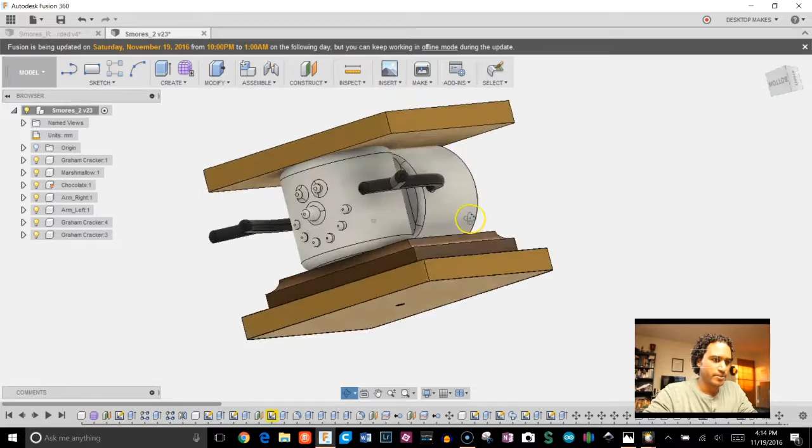Okay, let's go ahead and jump into Fusion. Here's our finished model, so this is what we're going to have when we're all set. Let's go ahead and open up our previous model. So this is what we have so far.

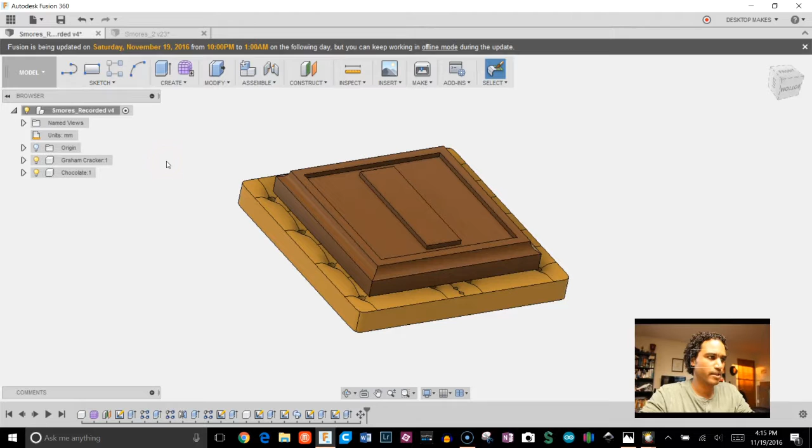Okay, let's begin this one. First thing we're going to do is start with a component. I'm going to right click, choose new component, and we're going to name this marshmallow. We see that our component is activated, so we can now go ahead and start sketching.

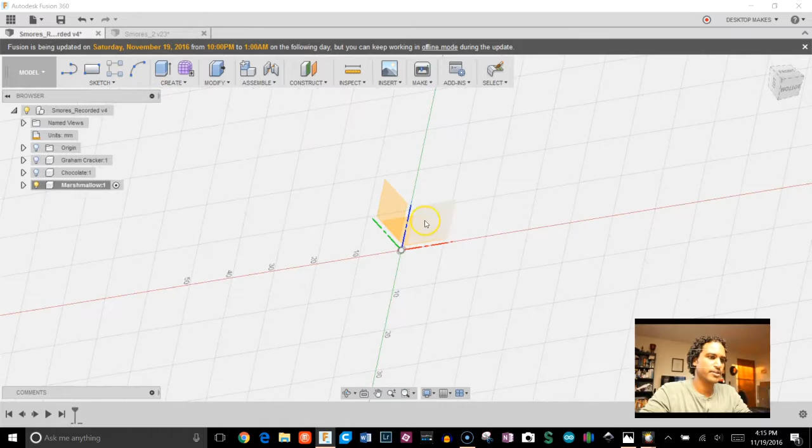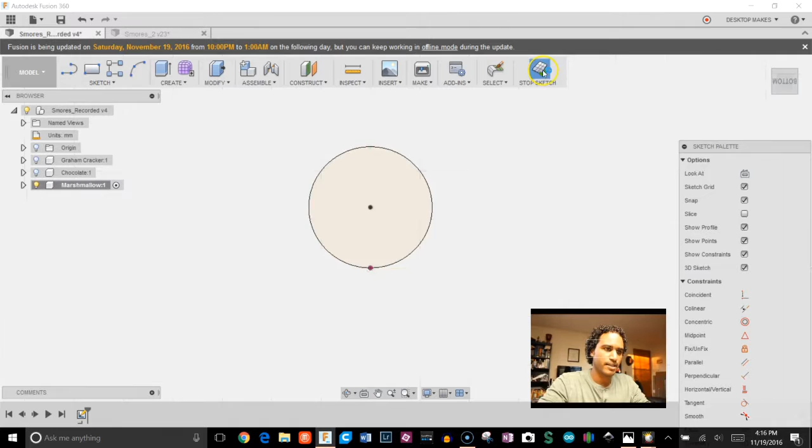I don't need to see this here, so I'm going to uncheck these light bulbs. We'll start with a sketch on our ZX plane. I'm going to create a circle somewhere up here, give it a diameter of 25 millimeters, and set a horizontal/vertical constraint right to that origin. Next, I'm going to enter a dimension of 12.5 millimeters and click Stop Sketch. We're going to extrude this out to 23 millimeters.

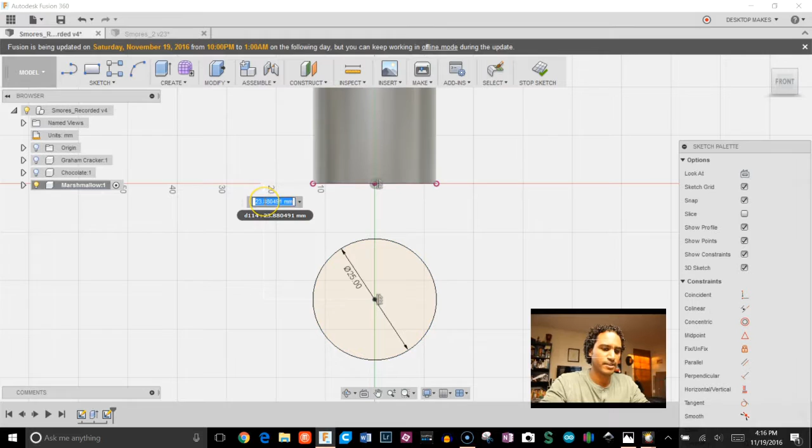Alright, create another sketch, this time on our XY plane. Same approach - I'm just going to draw a circle here, constrain it to that origin, and set a dimension of 11 millimeters because I want to get that little overlap in there. Okay, stop sketch, and I'm going to extrude this up 25 millimeters, click OK. Alright, next I need this bottom and top to be completely flat because it's going to sit on the chocolate.

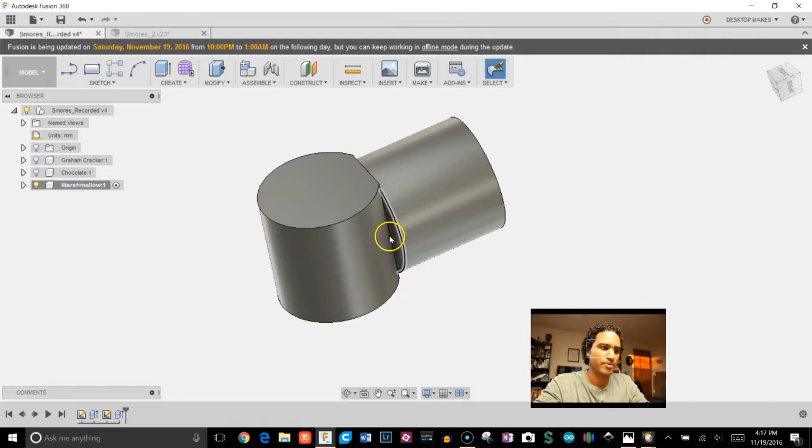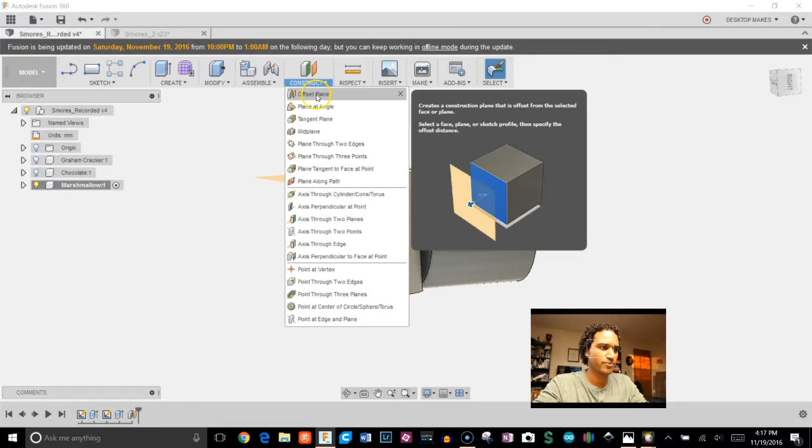And also I'm going to have the s'mores on top of it, and I need a way to be able to glue that in and have it have a good surface to glue to. So we're going to go ahead and create an offset plane, construct offset plane and choose this top plane here to base it off. I'm going to enter a dimension of -1 millimeter. Click OK. Let's do the same thing for the bottom, go in -1, choose OK.

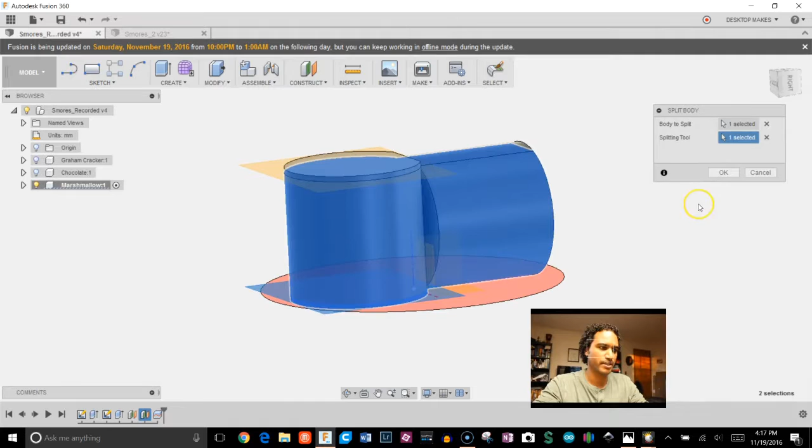Next, we're going to use that plane to split the body. So we're going to go to Split Body, choose our body, select our plane. We'll start with the top, hit OK. Do the same thing with the bottom - Modify, Split Body, choose our splitting tool, which is going to be our plane, click OK. Alright, so now if we go ahead and expand bodies here, we should end up with 3 separate bodies, our main body and the top and bottom ones that we split.

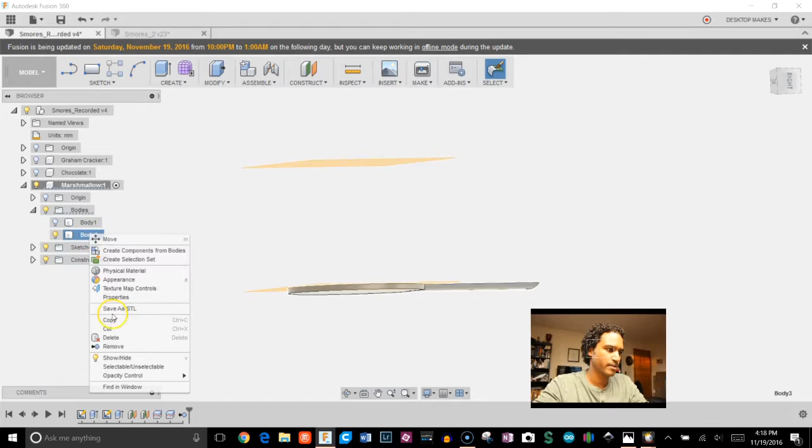The first one's our main one, and we can see we have these two here, which I don't need anymore, so I'm going to go ahead and remove them. Click remove, and we should be left with just our one body. Uncheck construction plane, that's what we have so far.

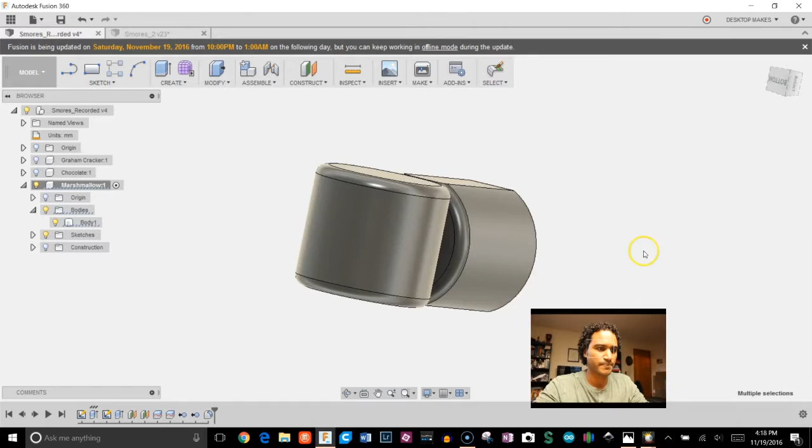Alright, next we'll enter some fillets. We'll go ahead and fillet this edge and this edge. You know what, let's grab all 4 and give them all a fillet of 1.2 millimeters. And we'll do the same thing for the back here, although with this one, I don't think it's going to let us do 1.2. We'll go with 1 millimeter fillet on the back. And that looks good. All right, we're starting to take form.

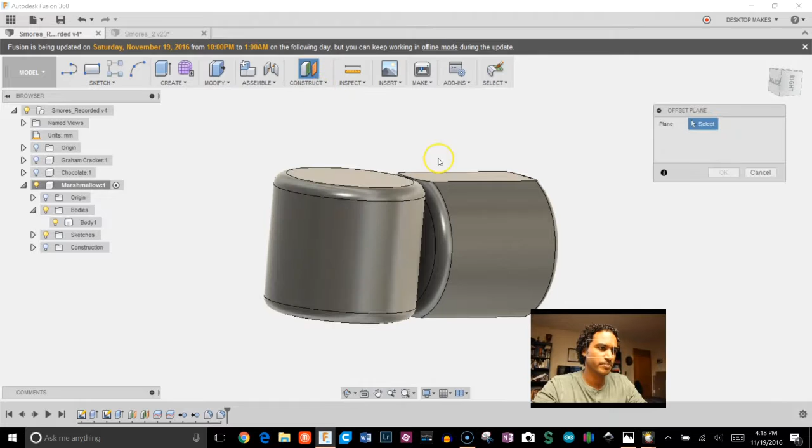So next, let's go ahead and draw our eyes, nose, and mouth. To do that, we're going to do a construction plane. Again, I'm going to base it off this plane. Come out, let's get a better view here. So let's go out about 21.5 or so millimeters. Don't have to get crazy exact, just about right there.

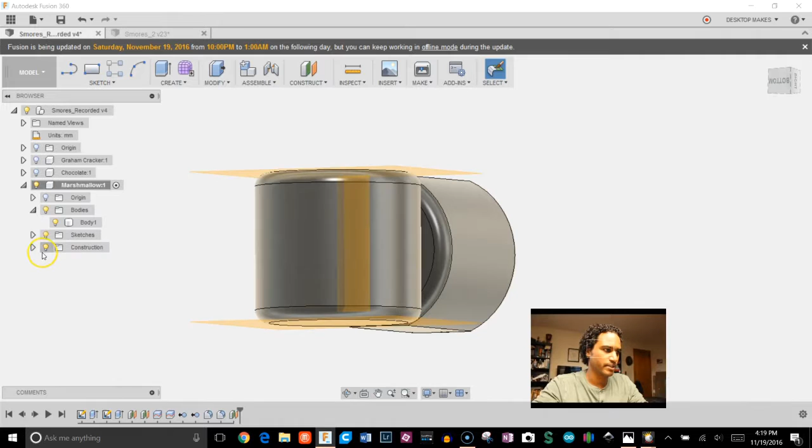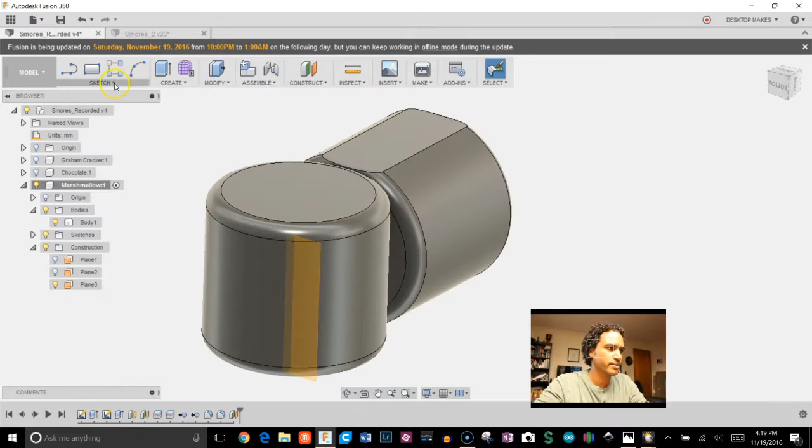And we're going to click OK. Let's bring that plane into view. Uncheck these two, I only need to see that one. Okay, I'm going to uncheck bodies for now. Actually, let's bring bodies back just so I can see where I am here. Okay, so we can see that plane going across. So let's go ahead and do sketch, create sketch. I'm going to choose that plane, and it should bring us to the straight view.

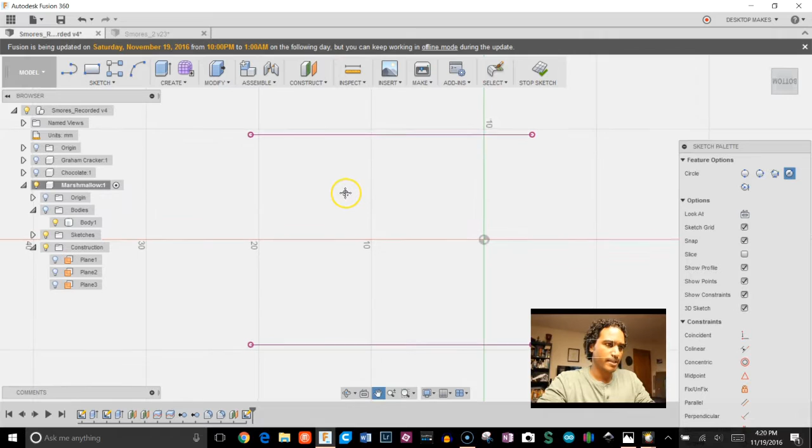Let's go ahead and project these edges here. I'm going to do this one and this one. So P for project, and then just select on these edges and click OK. Now I'm going to get rid of bodies, and I have that top and bottom line, so I know where I am here.

Let's hit C for center diameter circle, and I'm going to create some circles here. Before we do that, let's go ahead and create a center line. I'm going to go until I get my little midpoint triangle constraint, draw that in here, and make that a construction line by hitting X. Next, I'm going to create a circle, give it a diameter of 2 millimeters.

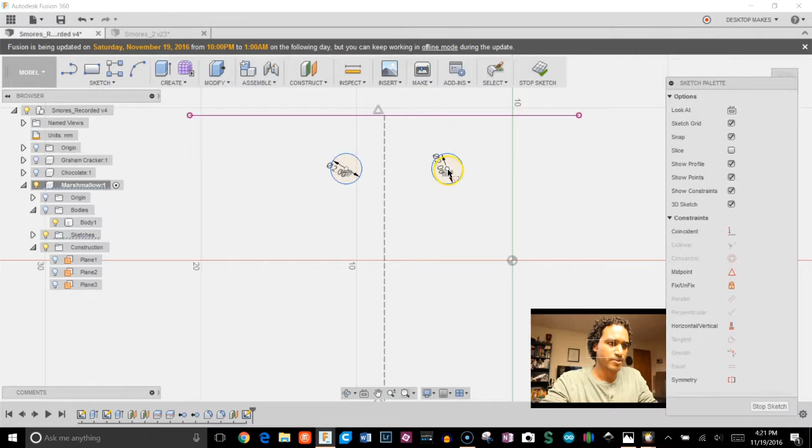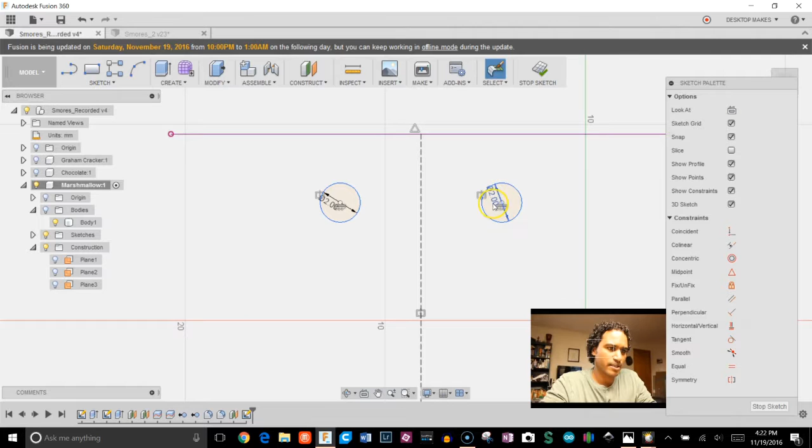Do the same thing on this side. I'm going to go ahead and make these constrained, so I'll grab the horizontal slash vertical so that they're even. Next I'm going to do a symmetry constraint. I'll choose this circle, and then this circle, and it should allow me to pick this middle constraint. Let's try it one more time. We'll try choosing the edges here. There we go. So now these are constrained from that midpoint, so they're always going to be the same distance from that center.

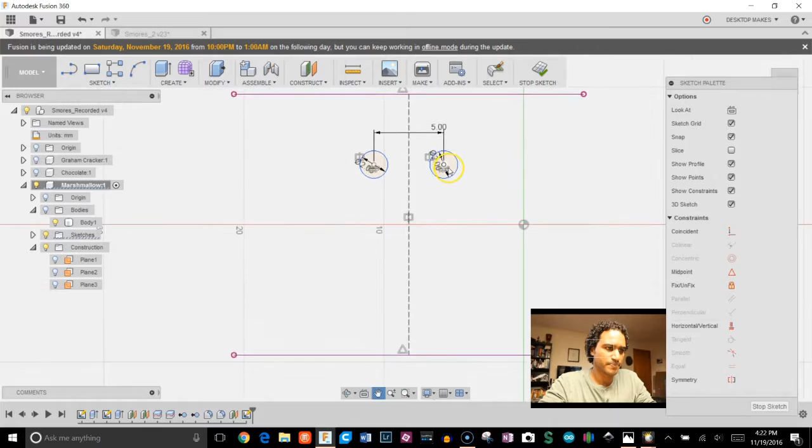So let's go ahead and give it a dimension, and we'll do 5 millimeters. And I'm going to move these down a little bit, a little more. Okay, now we're going to do our nose.

So we'll go 5 millimeter circle. And next we'll do our mouth. The way I approached the mouth was to first draw a line. We'll make this 13 millimeters.

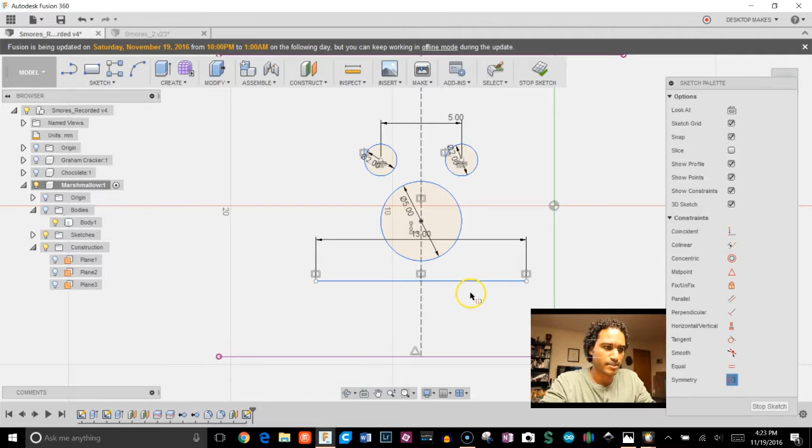And we'll do the same thing, grab our symmetry constraint to make this symmetric about that midline. So I'm going to grab one edge, second edge, and grab the line. And now that's right in the middle there. Let's grab our arc tool.

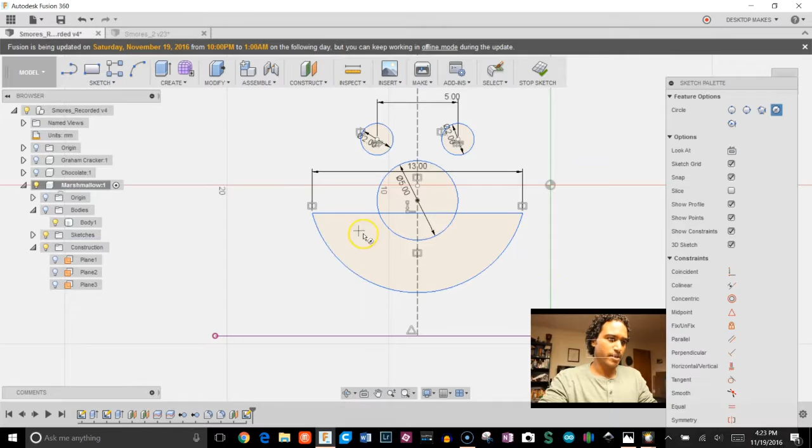So we'll go to arc, 3-point arc, and I'm going to give it a little smile. Let's move this up a bit, and I'm going to make that arc a little bigger. Okay, now actually let's make this into a construction line. So I'm going to choose the arc and the line and hit X.

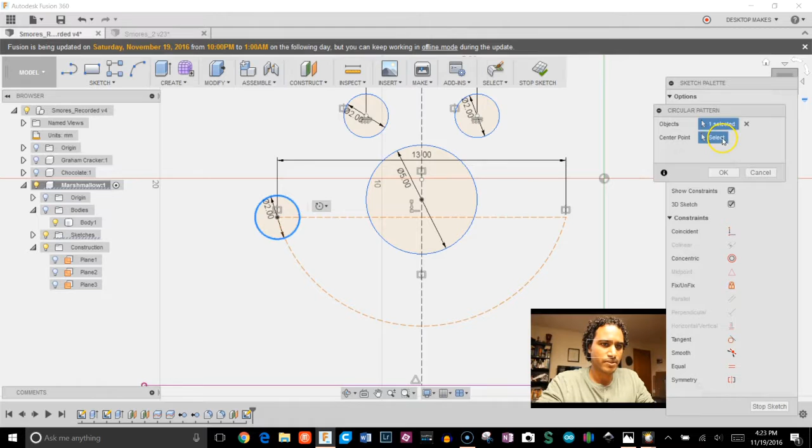Now I'm going to grab the circle tool, the 2 millimeter diameter circle, and I'm going to choose a circular pattern here. So let's go to a circular pattern. For the object, I'm going to select my circle, and for center point, I'm just going to select my arc here. And instead of full, I'm just going to go at angle.

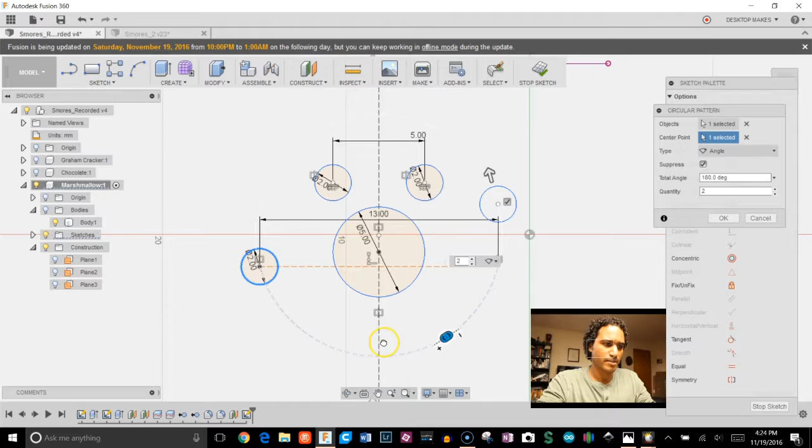And I'm going to grab the little slider here, and let's go ahead and move this. Let's zoom out a little bit. I'm actually going to bring this out— sorry, I grabbed the wrong tool. I need to grab this guy. So I'm going to come out and let's zoom in.

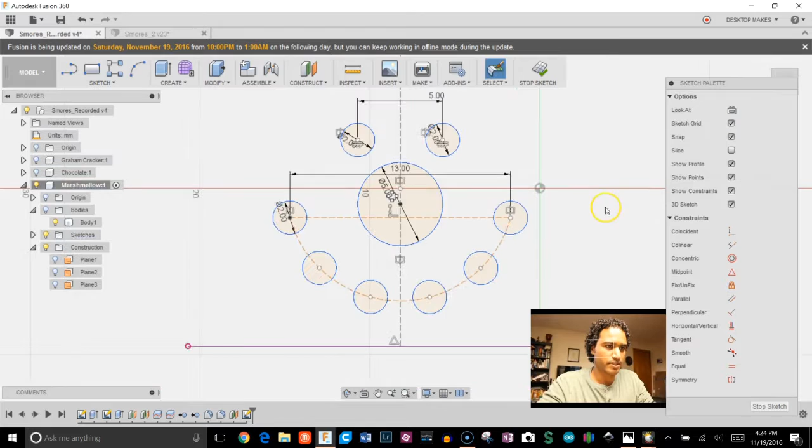We'll snap that right to that edge. And instead of 3, we're going to select 6. So we've got 6 circles, and we're going to click OK. Alright, so that looks good. Let's go ahead and stop sketch. Let's show our body, see how that looks.

Okay, so now I'm going to grab these and extrude them individually. So we'll start with the eyes. Let's uncheck bodies, and I'm going to grab each of these eyes here. E for extrude, pull it out. Instead of new body, I'm going to go to join.

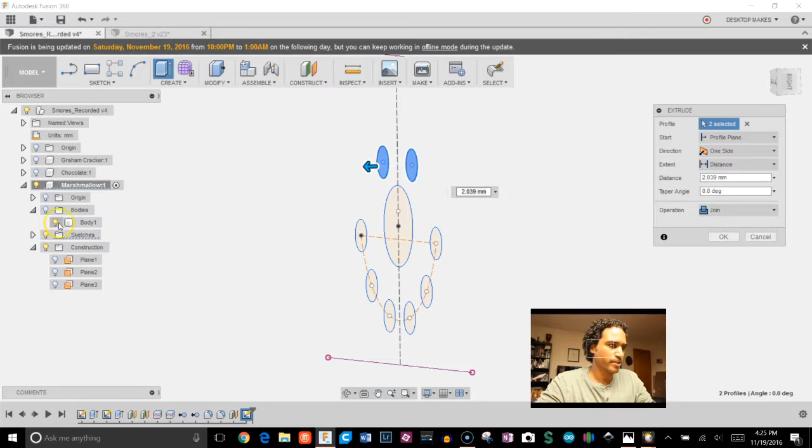Let's bring back our body so we see what's going on. And I'm going to come out, let's say about 3 millimeters. I'll just enter it in. That looks good. And let's go ahead and fillet these.

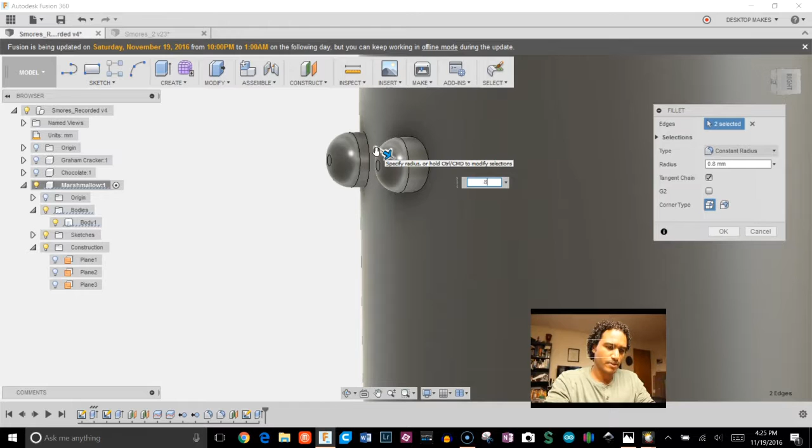So I'm going to do a, let's see, a 0.8 millimeter fillet. We'll do 0.6, click OK, and do the same thing with the bottom edge here. Do a 0.6 as well.

That looks good. I'm going to change that extrusion—I want to come out just a little bit more. So I'm going to come to my timeline and click on that. Let's try 3.5. That looks a little better.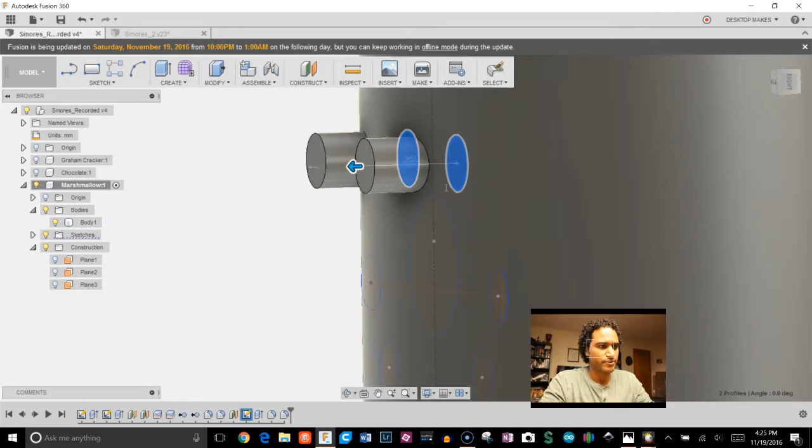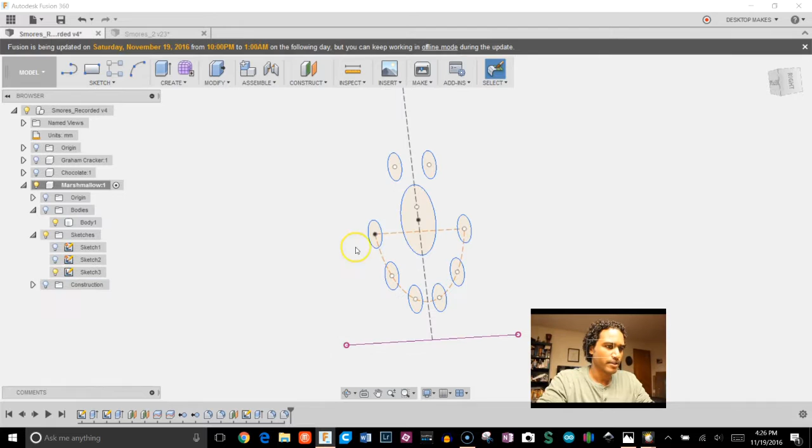Okay, so now we can go ahead and grab the nose. So let's uncheck bodies, check sketch. Where's my sketch? Oops, not construction line, I want sketch. Okay, so let's grab that nose, bring that out, bring back bodies, change this from cut to join.

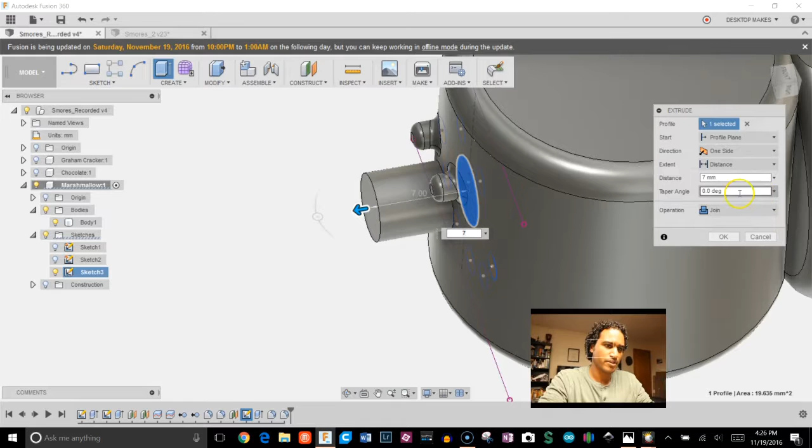And let's come out to about 7. And I also want to taper this in, so if you see this little slider here, you notice you also have a taper angle here. You can enter that in numerically, or you can just kind of move this slider until you get what you're looking for. So 11 looks good—oops, I should do -11.

Hit enter, and let's fillet this as well. We'll do 0.6.

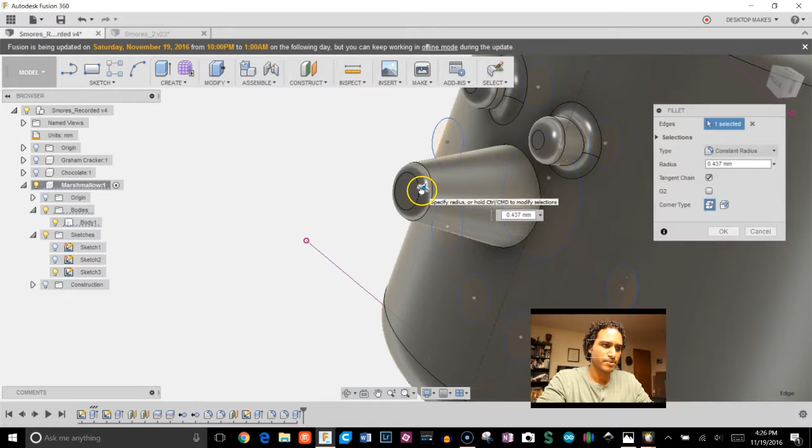And also fillet this bottom edge. We'll do another 0.6. That looks good.

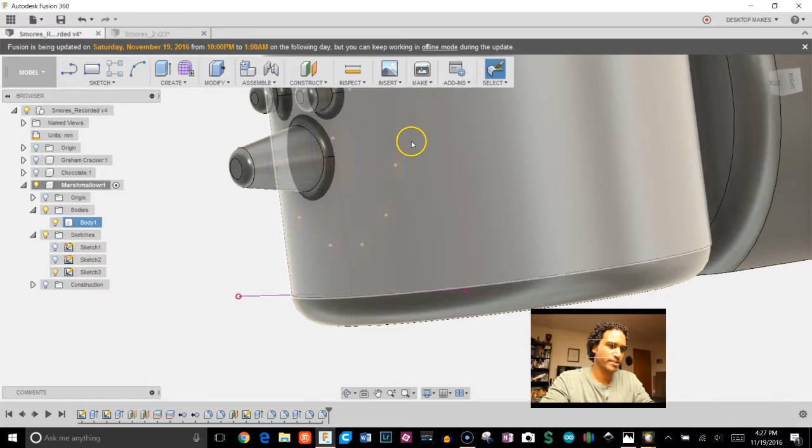Okay, what's left is just the mouth. The way we're going to handle this is I'm going to grab each of these in pairs and pull them out. Because this is curved, if I pull them each the same distance, these towards the center will be extruded a lot more than these that are further back.

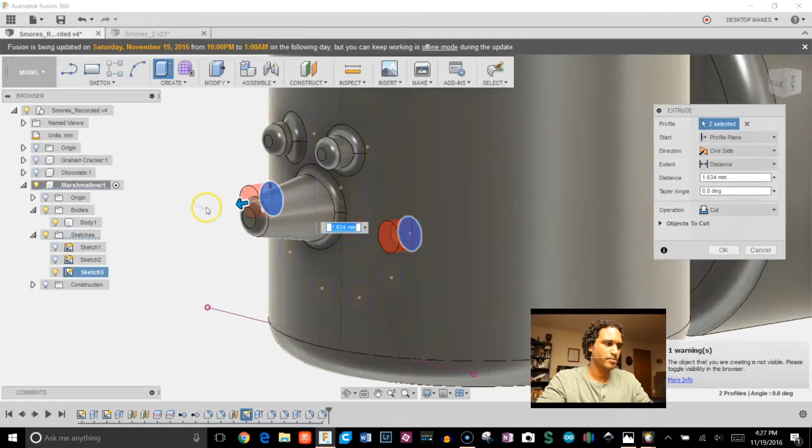So let's go ahead and grab, uncheck this. We'll grab this one and this one. Start dragging it out. Bring bodies back. Go to join. And let's make these, we'll say, I really want to see this edge here. Yeah, we'll go with 2 millimeters.

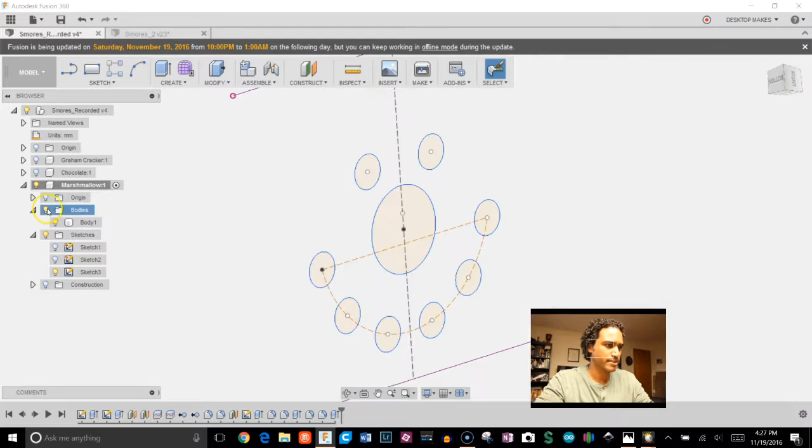And we'll go ahead and grab the next set. And I'm going to bring these out as well. Change from cut to join, and this time we'll do 2.5.

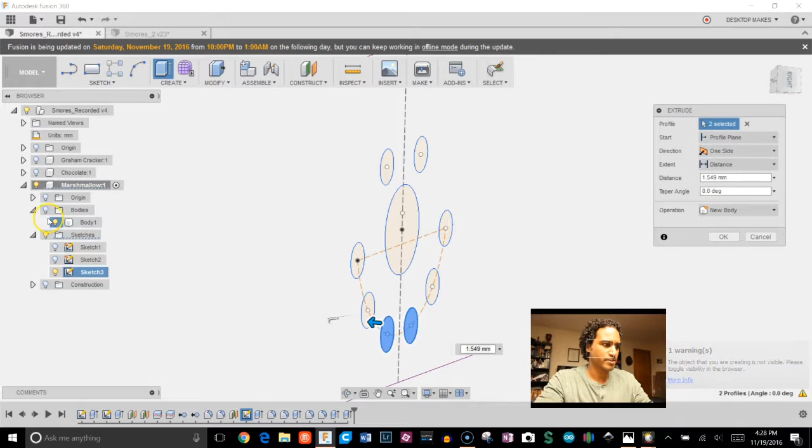And I'm going to grab my last pair, so which will be these two, and let's bring these out as well. And we're going to change this to join. Make this 3. Looks good.

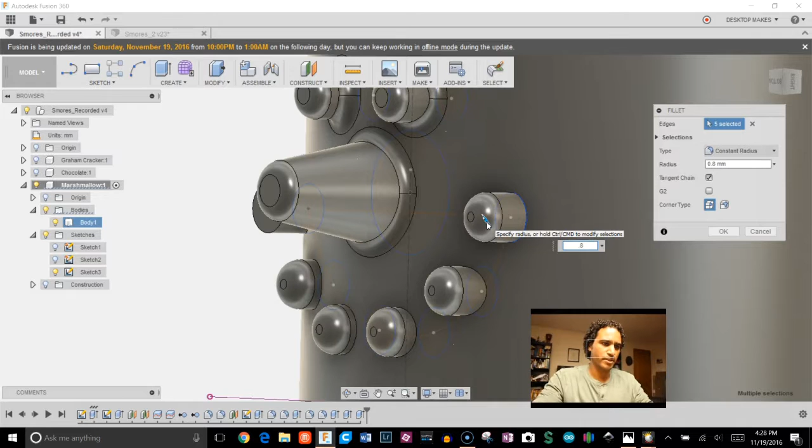They're roughly all about even, so I'm going to now grab my fillet tool and fillet each of these. We'll do 0.8 on this one. Click OK.

And that looks good. So let's go ahead and get rid of the sketches here, zoom out to see where we are. Okay, let's see how that compares with our actually finished model. Looks pretty good.

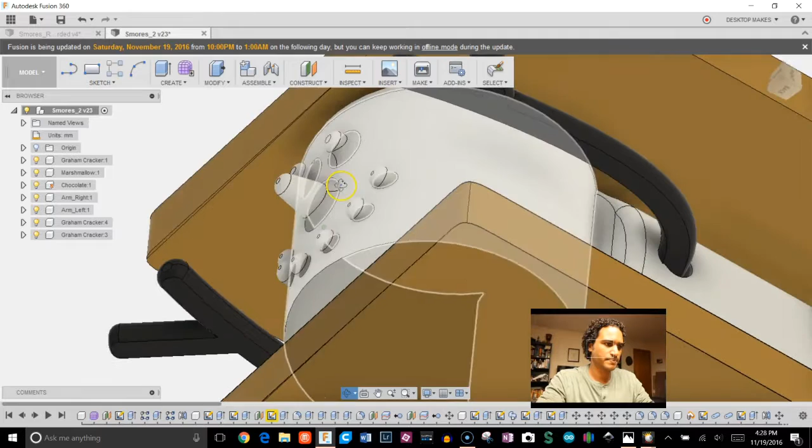I think I made my nose a little bit bigger this time, but you can play with that to get the size you're looking for.

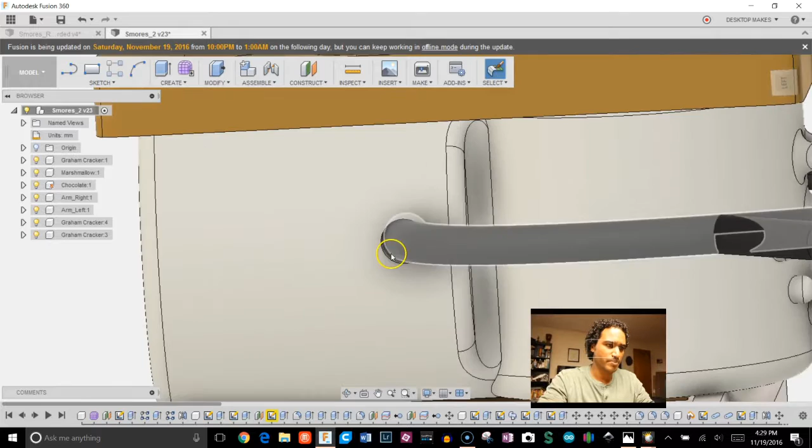So, all right, so what's left? Let's see, what else do we have to do? So we need the holes here in order to put our arms. In order to make the arms, we'll go ahead and create a sketch and extrude it in here.

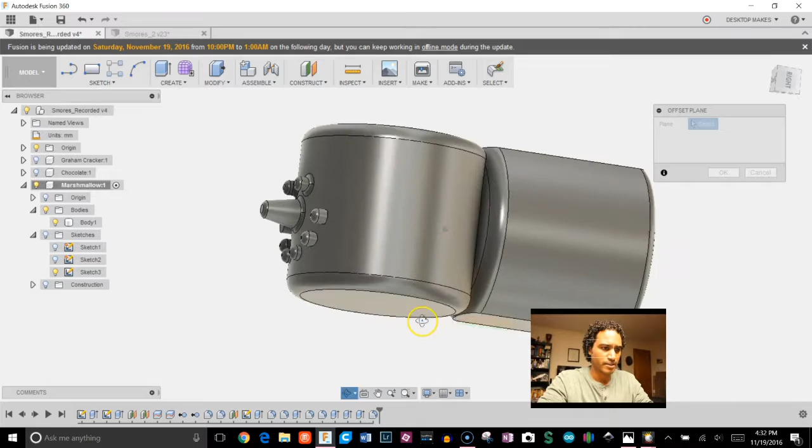So we'll go ahead and create an offset plane. Construct offset plane. We'll grab the origin here. Let's move this out. Where'd you go? Come back. Okay, we'll put that, just offset it in over here. Click OK. And let's take a look at that plane.

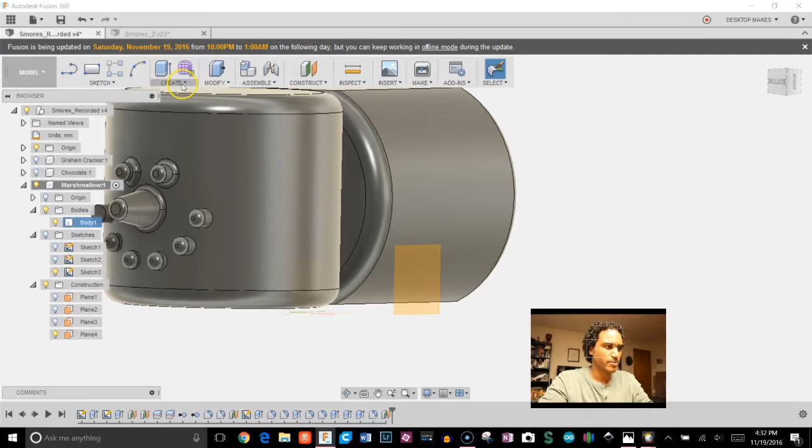So we'll go ahead and create a sketch right on that plane. I'm going to just turn this over. We'll create a circle just roughly in this area over here. We'll make it a 3 millimeter circle.

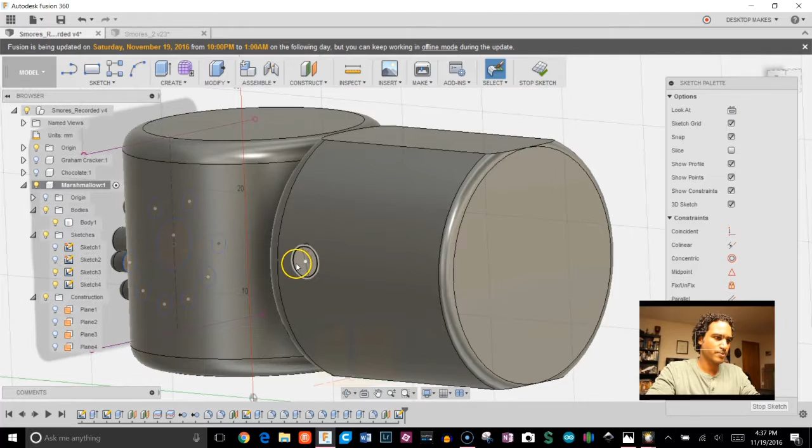Click OK. And now we're going to go ahead and extrude that circle in. So bring it in so that it goes in. I'm going to go in about 7 millimeters or so. But again, that depends on where you put that plane, to how deep it's going to go. So it's not critical here. Just get it in deep enough, because what we're going to do is just print the arms, and then glue it in there.

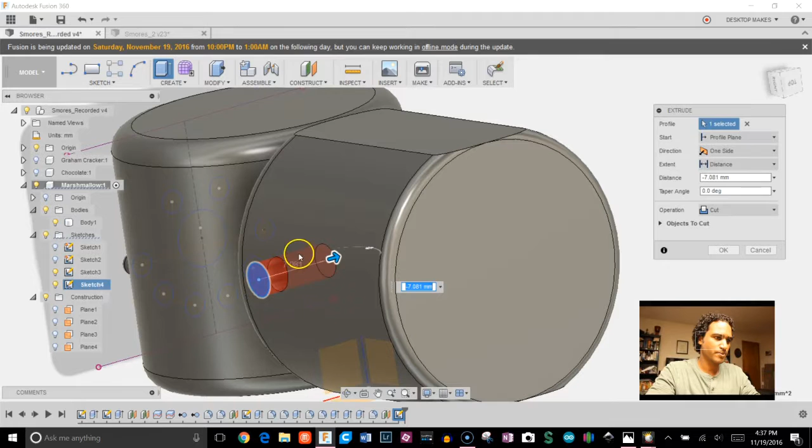So that looks pretty good. I'm just going to click OK. And now I'm just going to mirror that to the other side. So we're going to go to Create, Mirror. And for mirror, I'm going to select Features. My objects, I'm going to select that extrusion right from my timeline.

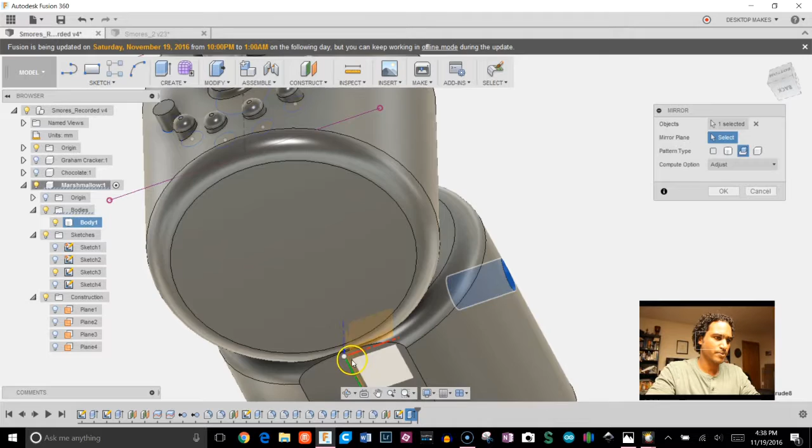And for mirror plane, let's go ahead and select that mid plane here. It might be a little hard selecting it. So there we go. You may need to just uncheck bodies and then just select it and bring bodies back. Okay, so that should mirror on that side. We're going to click OK.

And there we go. We have a hole here and a hole here as well where we can put our arms. Okay, so let's take a look and see what we have.

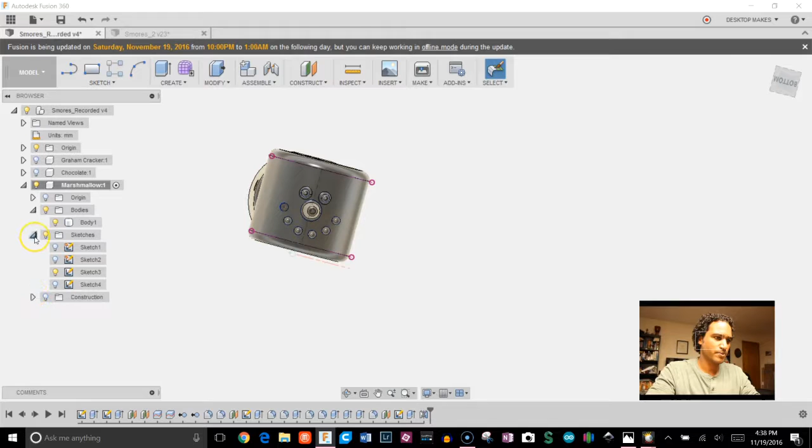Forgot to fillet this guy, so I'm just going to do it here. I think I used 0.6. All right, so that's our marshmallow snowman.

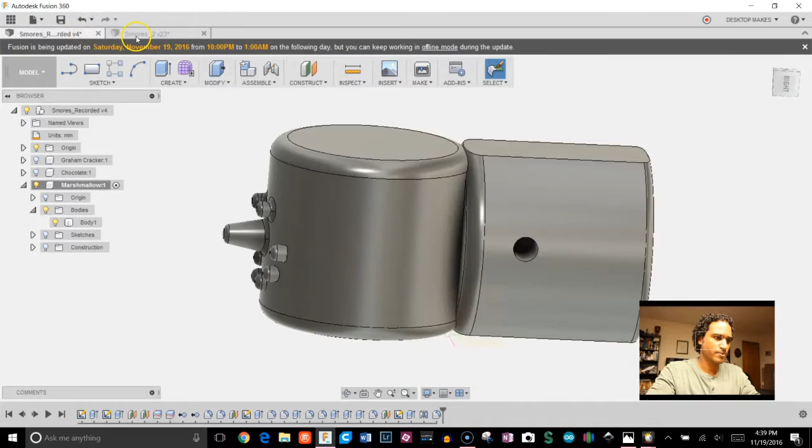So what did I do here? I made it white, so let's go ahead and I'm going to click A for appearance. Grab, let's see, we're going to plastic, opaque, I'm going to go down to matte, and just drag the white over.

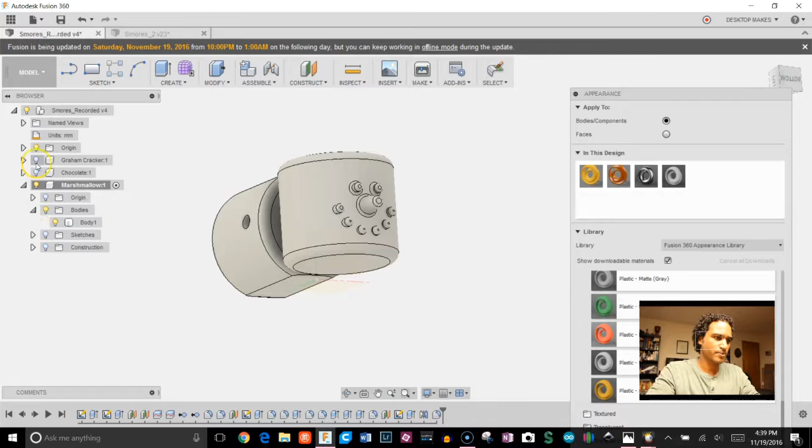And let's go ahead and bring our other components that we created. So we'll check origin, let's bring chocolate and graham cracker. And I'm going to check the top of the browser here so I can see everything.

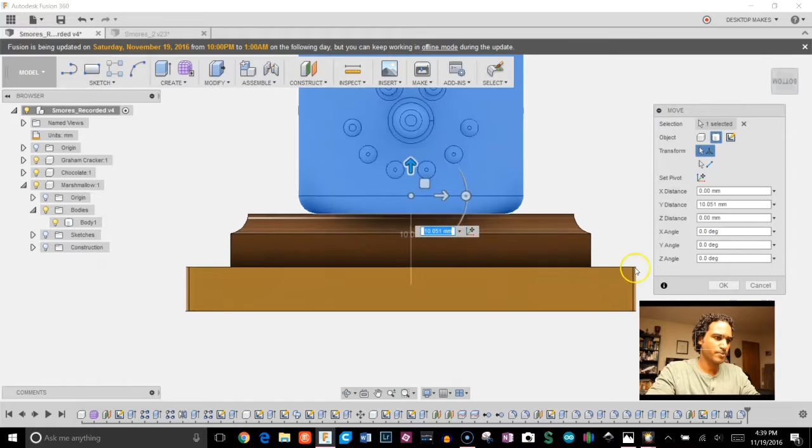Okay, so now I'm just going to click this, click move, and we're just going to move it into place. I'm going to grab the arrow here, zoom in, and just place that right there. Click OK. And there we go.

We've got our graham cracker, we've got our chocolate, we've got our marshmallow. So the only thing that's missing is just the arms, and we'll go ahead and do that next time.